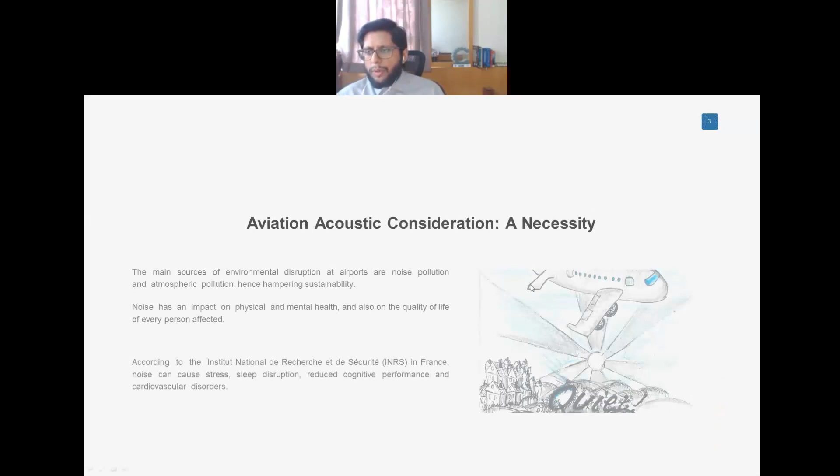So for today, we will be discussing about aviation acoustic considerations. That is the topic of today, and how it is related to environment and hence sustainability.

As you would know, the main sources of environmental disruption at airports would be noise pollution and atmospheric pollution, thereby hampering sustainability. I will come to this in a moment, how we define sustainability. I believe most of you would already know what sustainability is, what sustainable development is, what the SDG - Sustainable Development Goals - is, and how our studies and everyday life relate to these 17 goals of SDG.

Noise has an impact on physical and mental health, and also on the quality of life of every person affected. According to the Institut National de Recherche et de Sécurité in France, noise can cause stress, sleep disruption, reduced cognitive performance, and cardiovascular disorders. I will bring a little bit on how noise generated is basically affecting a person's health. The consequences of noise environment at airports are inevitable.

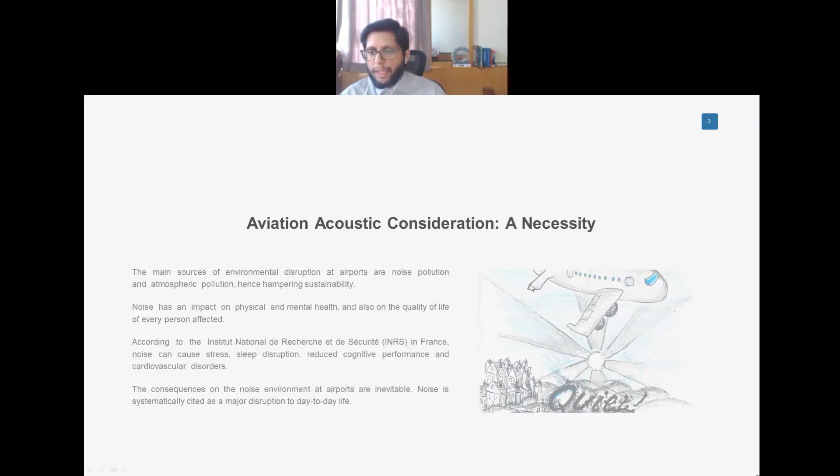Noise is systematically cited as a major disruption to day-to-day life, based on studies that have been made and feedback received through complaints. The residents are complaining on an everyday basis - that is quite an issue. So how should aviation acoustic noise or acoustic performance be evaluated and improved?

A little bit about the aviation industry - I believe that most of our listeners today are within the aviation industry.

So a little bit of facts and figures, but bear in mind that these facts have been last updated by the end of 2019. As you would know, perhaps some of the figures would change because of the COVID-19 consequences, the repercussions due to COVID-19.

I am quite optimistic about the industry. As you would know, by now there are around 1,400 airlines operating across the world, flying over 25,000 commercial aircraft. So the total number of commercial aircraft that these airlines possess would be 25,000.

In 2019, 4.5 billion passengers were carried across the world. Airspace is managed by around 173 air navigation services and across 3,900 airports. This is quite a lot, considering that aviation is a quite recent industry, around 100 years plus, compared to other industries like automotive.

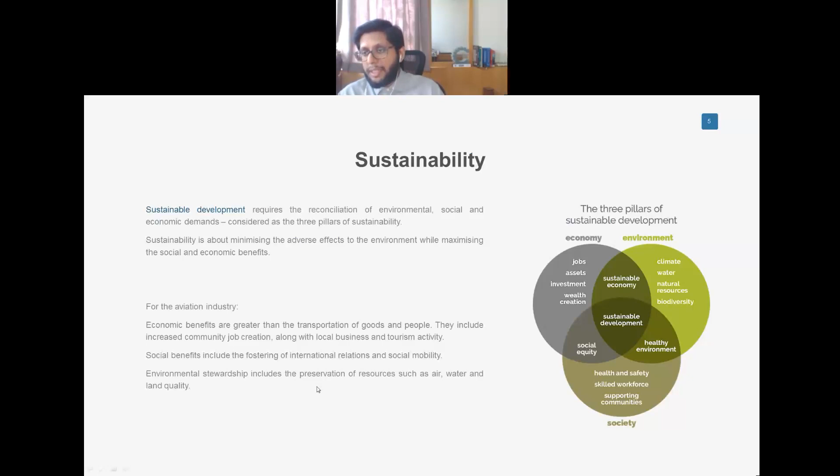But whenever environment is concerned, we need to advocate for it. We need to make sure that our technologies are not affecting the environment, or at least minimizing the effects of the technologies. So this is a bit of the basis of noise.

Sound is a vibration that propagates as a mechanical wave. This is the physics of pressure and displacement through a medium, and it is measured in decibels, dB. What is sound? A basic definition from dictionary.com.

Noise is basically any unwanted sound. Noise pollution is an environmental stressor second to air pollution, meaning that after air pollution, the most consequential type of pollution is noise pollution.

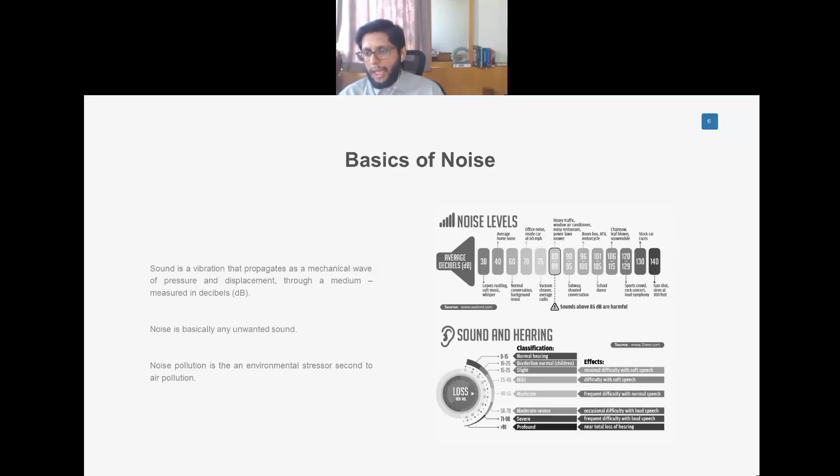So what is the impact of noise on humans? Although most of you would be in engineering, I guess at the very least you did biology at some point in your education.

Researchers have found that dying from a heart attack was more common among people with increased exposure to aircraft noise. This means that if a person is not sick, the chances of having a heart attack if exposed to aircraft noise is higher - the probability is higher.

So you have the acute effects, chronic effects, and long-term effects. The long-term effects include permanent hearing loss and tinnitus. Tinnitus means the person will be hearing a noise all the time, like a vibration inside the ears.

Coming to the chronic effects, hypertension is quite clear, along with reduced learning and productivity - this is what I meant earlier about cognitive performance. And endocrine disruption means the hormones are being disrupted.

The acute effects are short term, and you wouldn't get a very good sleep. You will be annoyed, and perhaps your hearing ability would be affected at some point, even in the short term.

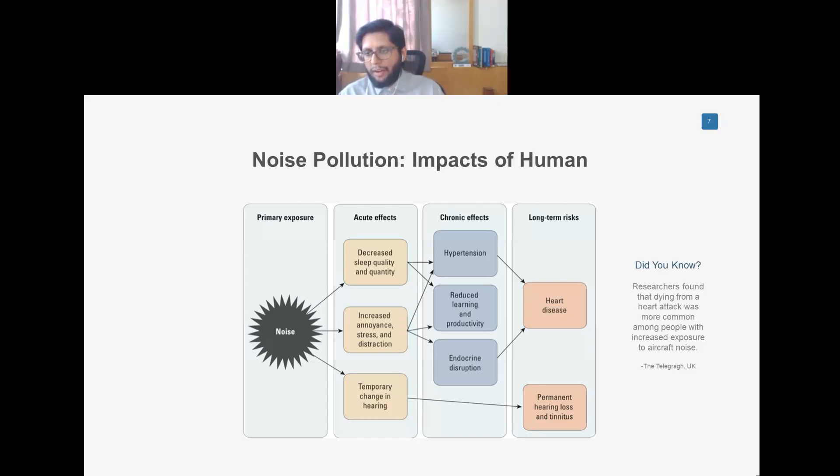This diagram is about noise pollution, not necessarily due to aircraft, but this is the basis of the noise. What is the effect on human beings? Okay, coming to the real topic of propulsion and aircraft noise generation.

There are two primary sources of aviation noise: aerodynamic and engine. The aerodynamic noise results from the flow of air over the fuselage of an airplane. While the aircraft is taking off and landing, the noise is large compared to when it is cruising.

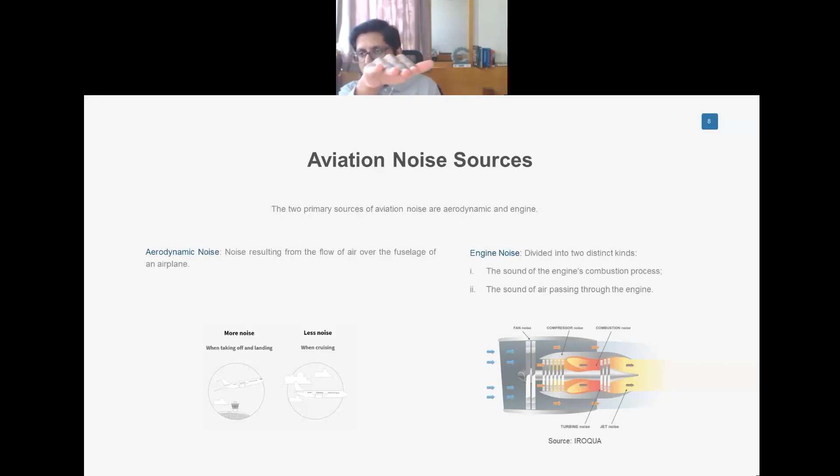So why is that? Maybe you can think about putting your hand outside the car window while driving, perpendicular to your movement - you'll notice the noise is higher than if you put your hand horizontal to the direction you're going. Like this, it creates much more noise.

The aircraft makes more noise because the airflow is almost perpendicular, around 95 degrees - not in the same direction as the airflow. That is the basis. From 0 to 90 degrees, the more you increase the angle, the noisier it becomes. That's why when cruising, the sound is less.

Now what about engine noise? The engine noise is generated because of two main reasons: the engine's combustion process, and the sound of air passing through the engine. You can see in the picture these two distinct kinds, though it's quite distributed, showing the noises generated through an aero engine.

The two most consequential ones would be, maybe you can guess, the fan noise and the jet noise - the inlet and the outlet. These two are louder compared to the compressor noise and turbine noise, which is inside the engine.

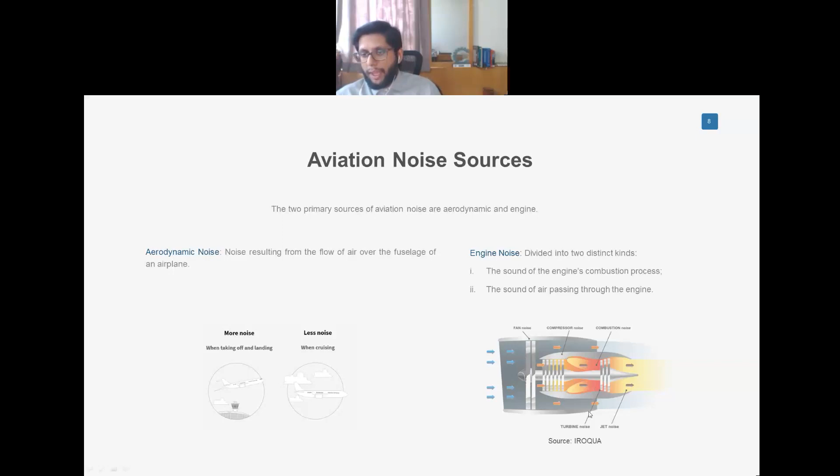In a turbofan, aero engine noise is created by the interaction between flow non-uniformities, stator blades, and rotating blades. Perhaps you can imagine from your previous class where the stator blades and rotating blades are located.

In modern high bypass ratio turbofans, the noise generated by the fan system plays the main role compared to that generated by the turbine stages and compressor. Comparing turbofans to high bypass ratio turbofans - we will come into this later in more detail, but perhaps you can get an idea of what I'm explaining. So that is regarding the fan.

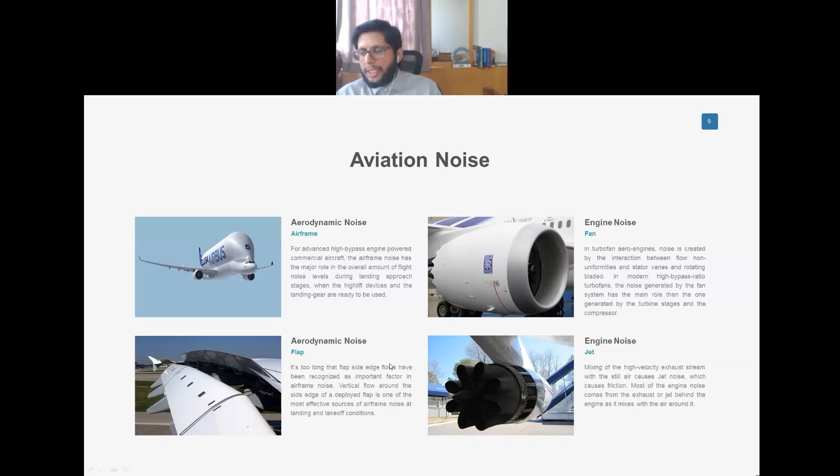Considering the actual technologies - propulsion noise. The engine has traditionally been the major source of noise, due to what we've seen in the picture, and other engine noise sources such as combustors and bleed handling are now becoming even more significant. Because the fan, turbine, and compressor turbomachinery noises have been researched and new technologies implemented.

So maybe if one of you is interested in doing research, one gap you could see is that the noise due to combustors and bleed handling needs to be studied more now compared to the other noises.

Engine noise has significantly reduced as the bypass ratio of the engine has increased. So the higher the bypass ratio, the lower would be the noise. It is inversely proportional.

Acoustic liners in the nacelle are important in reducing the noise from engine internal sources as it propagates along out of the intake, bypass duct, or core duct. So the sentence explains itself.

The aircraft takeoff and climb performance has an important influence on departure noise since the thrust required and altitude gain greatly affects noise heard on the ground.

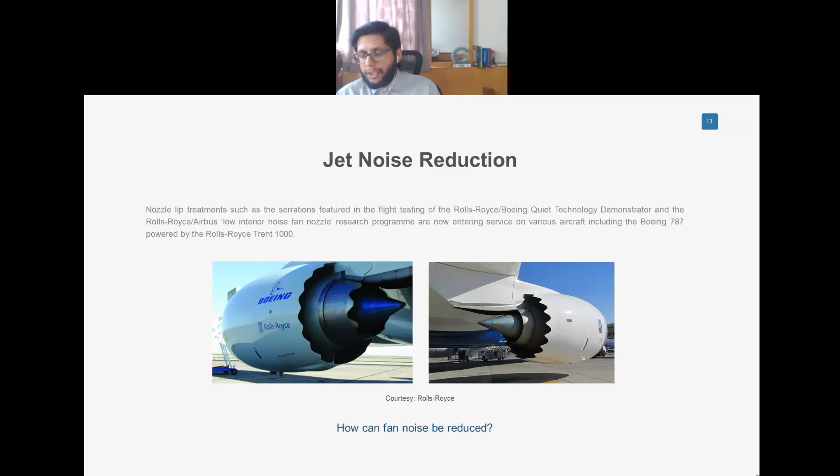Okay, coming to the fan noise reduction with the reduction in jet noise. Fan noise is becoming the dominant source of aircraft noise. So design features of the fan system for minimum noise include choice in the number of rotating blades and static vanes, the distance between these two rows of blades and vanes, and detailed geometries of the rotor blades and stator vanes. Okay, these are vanes, and then stators.

I'm sure that you followed the class of Rahim, so you would have a better idea of what is being written over here. So key issues are the fan aerodynamic and mechanical performance, stability and stall margin, and the manufacturing complexity and cost.

So if you are interested about doing simulation and modeling for your masters or for further studies, and you are also interested in acoustic technologies, that is one point for you to look into, because there is a gap in looking for solutions to decrease the fan noise as well as the compressor and turbine noises.

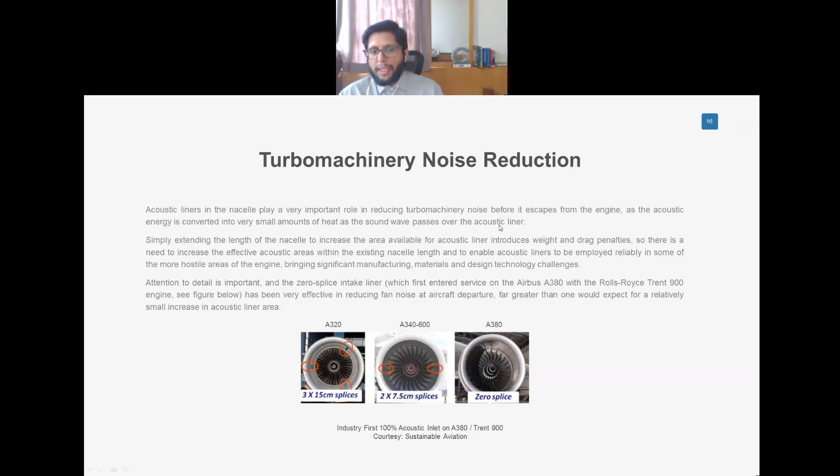Okay, so it has been quite a lot of technologies. Let me try to resume what we have been speaking about and where we really are.

The reference for that is 'Technologies for Aircraft Noise Reduction.' It is a review paper published in 2020, this year. Please go through it, look for it, and you will get much more information about these technologies that are being employed.

Reducing engine and airframe noise has formed a key element of UK aerospace manufacturers' design criteria since the introduction of jet aircraft in the early 1960s. As you could see in the previous trend, two trends have been observed. The first is a significant step change reduction in noise associated with increase in engine bypass ratio - this is one key approach that's been adopted, increasing the bypass ratio.

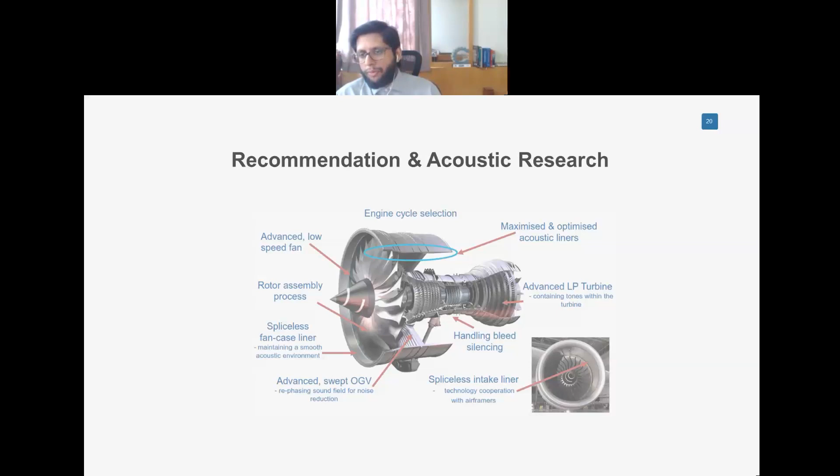The other approach really being looked at nowadays is acoustic liners. As you can see here, I've circled it - this tries to make it soundproof, kind of. So it's already spliceless, but we can still make it soundproof at some point. That's about acoustic insulation.

So you should be looking at materials that can be used to cover the nacelle, to cover these acoustic liners. But of course, the materials cannot be heavy, otherwise the weight of the engine will be heavier, and the performance will be compromised. So you need to look for materials that are light but still deliver sound insulation. This is regarding acoustic liners, and as well you can look at the other ones.

Okay, so environment. This is related to sustainability now. We have already looked at technologies, the technical aspect. So let's see the sustainability aspect. Whenever any aircraft is being designed, you have a combination of parameters that you need to look at so that the aircraft efficiency is good. You have the performance that is related to safety, and as well as performance, but you also have the environment attributes, which is noise and fuel.

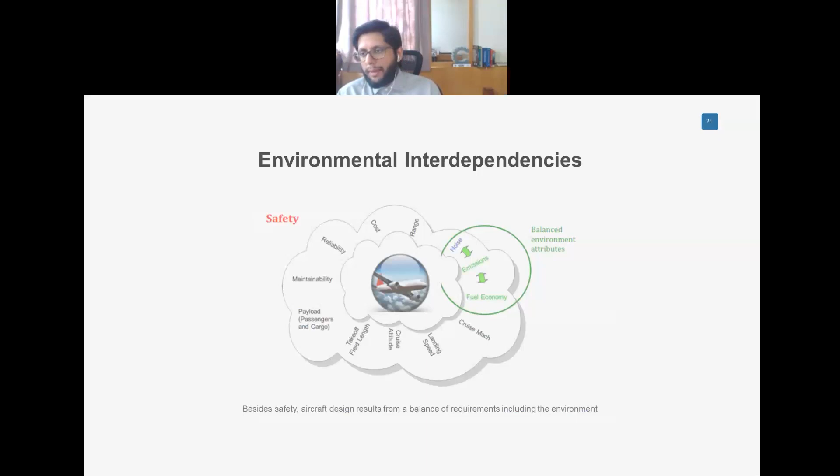So these two are interrelated. There are two emissions: you have fuel emissions and you have noise emissions. These two emissions are both attributed to the environment, of course. So whenever you want to decrease noise, like I mentioned before, maybe the fuel efficiency might be compromised. So it goes vice versa.

So the local environment agenda for aviation is driven largely by noise and occasionally by local air quality impacts, whereas the national and international agenda is primarily focused on climate change and carbon dioxide emissions. So you can see that the international and national agenda as well are quite focused on climate change and carbon dioxide emission. What about noise emission? Not really, yeah? You cannot see it over here.

So addressing these often competing demands is a constant challenge. Achieving an improvement in one area may come at the expense of another. Furthermore, noise solutions must be compatible with all other design requirements of both engine and aircraft. For example, the aircraft performance, the aircraft operating costs, the business needs, the manufacturer and the operator, the safe operation of the aircraft. So all these design parameters need to be taken into consideration.

So to best match the different requirements, the aircraft and engine manufacturer should be working closely so that we can come up to an optimum airframe and engine combination. Not all technologies are optimum on all aircraft, of course, because it is being compromised, and a total system optimization has to be conducted. So you need to look at the complete aircraft performance while designing aircraft.

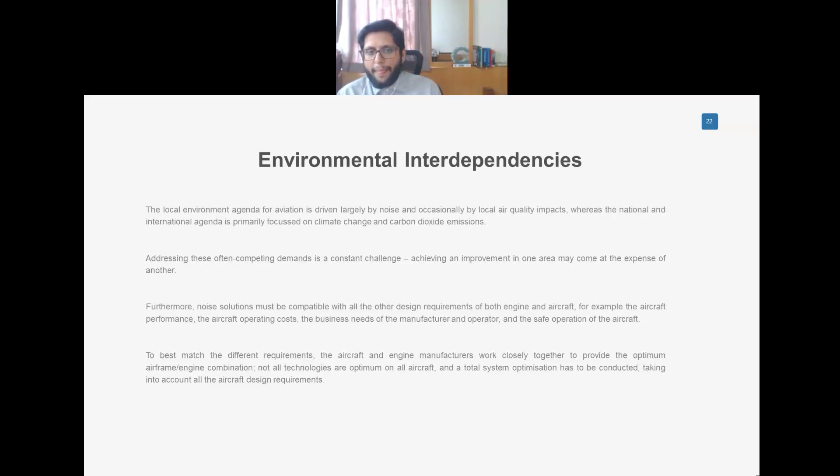So this is a bit of the balance environment attribute, as I just mentioned. For example, the engine parameters for the Airbus A380 were being influenced to meet the QC2 departure noise level. This is an operational demand at the London airports. So there has been a detriment to it, regarding the fuel burn and thus CO2 emissions. So if they wanted the noise to be lower around the airport, the aircraft somehow has burned more fuel, thereby emitting even more carbon dioxide.

Another example would be about the large extension of cowling around an engine. It will definitely reduce the aircraft noise, but potentially lead to increased aircraft weight and drag, resulting in more fuel used in operation. So this is again an example of trying to contain the noise, but it is being compromised by the weight and drag, and hence the fuel efficiency.

Another example would be the open rotor engine architecture, which offers significant potential for reduced fuel burn and CO2 emission. Although open rotor engines are likely to be quieter than today's turbofans, there is a trade-off between the fuel burn advantage and the noise reduction potential of conventional turbofan design. So there is again a compromise between these two.

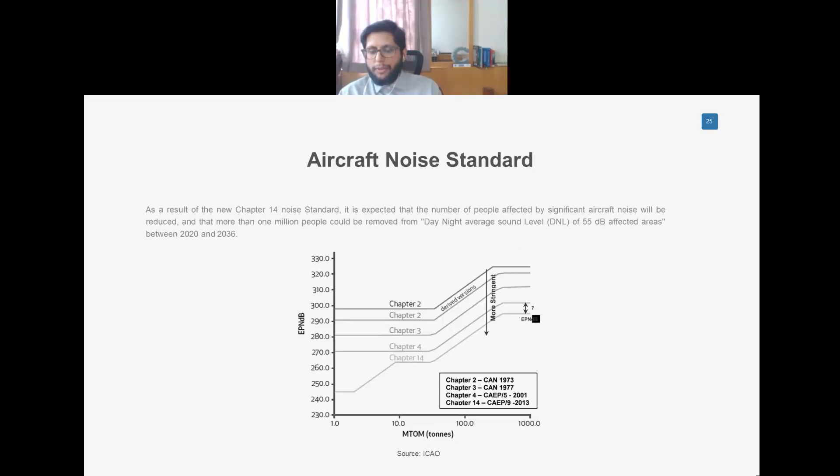How do we quantify aircraft noise? There are basically four types of noise metrics used to monitor the noise level around airport areas: time-based noise metrics, single event-based noise metrics, threshold-based metrics, and track-based measures. At least you should be aware that there are four types of metrics that can be used to measure and quantify aircraft noise.

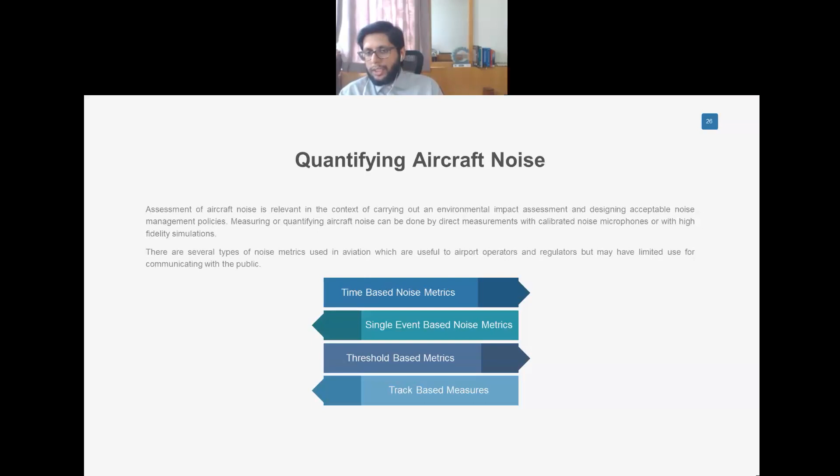This can be done by direct measurements with calibrated noise microphones or with high fidelity simulations. So if you have the proper input, you can simulate it, or do the actual test, or maybe do both to make sure your simulation is calibrated and correct. Although the four types of metrics are general methods that can be employed, ICAO has its own measurement.

And this is the reference. This picture shows the three reference points that should be taken into consideration while the aircraft is being tested for noise performance: the flyover, the sideline, and the approach.

So the aircraft acoustic certification involves measuring the noise level of an aircraft in effective perceived noise level (EPN) at three reference points, as shown in the picture. If the aircraft manufacturer passes this test, it means it can be certified by ICAO.

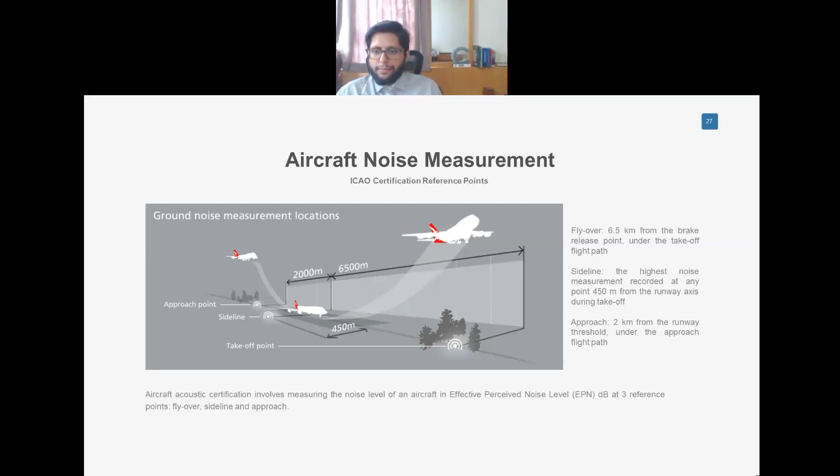Now coming back to the title, gearing towards sustainability, for quiet skies and sustainability we need to find a framework, a way to ensure that this target of quieter skies is being achieved systematically. For this, ICAO has brought forward a framework with four approaches, four techniques that need to be harmonized to make a balanced approach.

The first approach is reduction of noise at source, that is the aircraft itself. The second is land use planning and management, so that people basically don't have houses near the airport—that is about the planning, the land use planning.

The third is noise abatement operational procedures, which is a job done by the pilot. Perhaps not only the pilot, but sometimes it is up to the pilot to decide which way to approach the airport. Otherwise, the pathway is already set by the people concerned, and the pilot just follows the new route, so as to avoid crossing near residential areas.

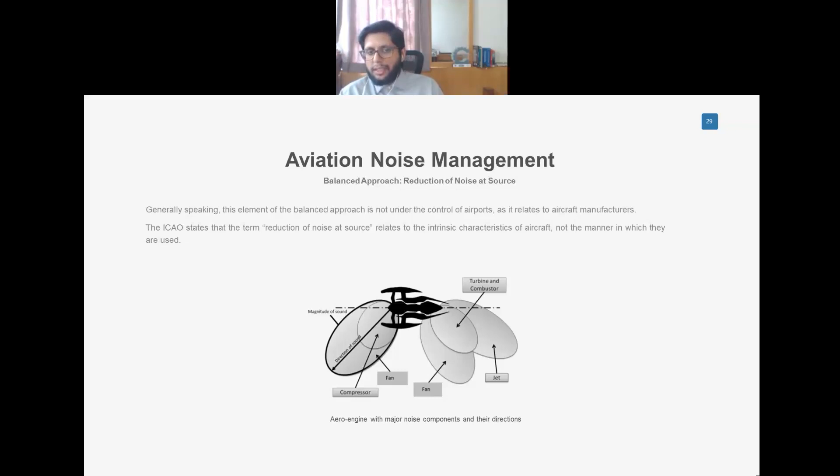The second one from the balanced approach is about land use planning and management. This can be effective in ensuring that activities taking place near the airport are compatible with aviation. The goal of this principle is to minimize the population affected by aircraft noise by means of zoning - that is, you have a certain zone. Different noise zones around the airport are defined to take account of aspects such as population density, increased airport traffic, or logistic activities. A good example would be KLIA, which has been shifted to Sepang.

It is quite far from the residential area. Over there it is quite an industrial zone, and a cargo zone, and there are quite few residents near the Sepang KLIA airport.

Land use planning and management methods may be characterized as follows: there are three - the planning instrument, the action instrument, and the financial instrument. So you have three subdivisions to ensure that land use planning and management is being implemented properly.

The planning instrument consists of ensuring that planning is coherent, drawing up legal definitions of zones, and considering relocation rights for landowners. Let's say they already got the land, so let's see whether there is any possibility for them to shift, and to offer compensation. So this is the planning.

The action is what needs to be done and what is being done: building regulations, soundproofing programs, assignment of compatible users to purchase land, land management review, and grants - allocating grants for relocation and housing of affected residents.

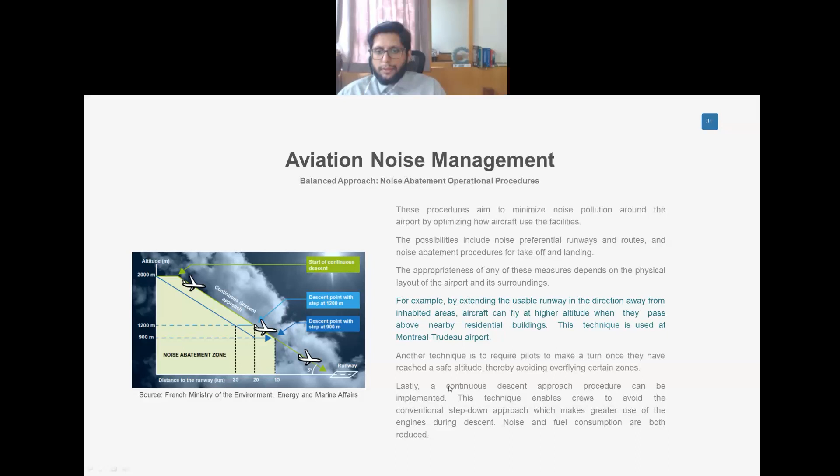The fourth one, the last one, is about operating restrictions. Restrictions can be placed on aircraft operating at certain airports. There are four types: global restriction, applied to all traffic at an airport; restrictions specific to certain types of aircraft because of their performance; partial restrictions, which apply about daytime and night time, specifying what times they can be operated; and progressive restriction, which entails gradually decreasing noise exposure over a period of time before reaching the target noise level.

So this is a progressive restriction being implemented as time goes along. Some countries, especially industrialized countries, have considered banning certain noisy aircraft from the airport. This measure can have serious economic implications for airlines concerned. If they put a ban on certain aircraft, you can imagine this will have a repercussion on the airline.

Hence, ICAO advises to start with the 3 principles, keeping operating restrictions as the last resort, because it is related to economic development as well. That is why it is taken as a last resort. Let's say the airline is performing well, but its aircraft is quite old. If you put a certain restriction, that has an economic implication on the jobs of the people working in the airlines, if the airline has to stop operating certain aircraft.

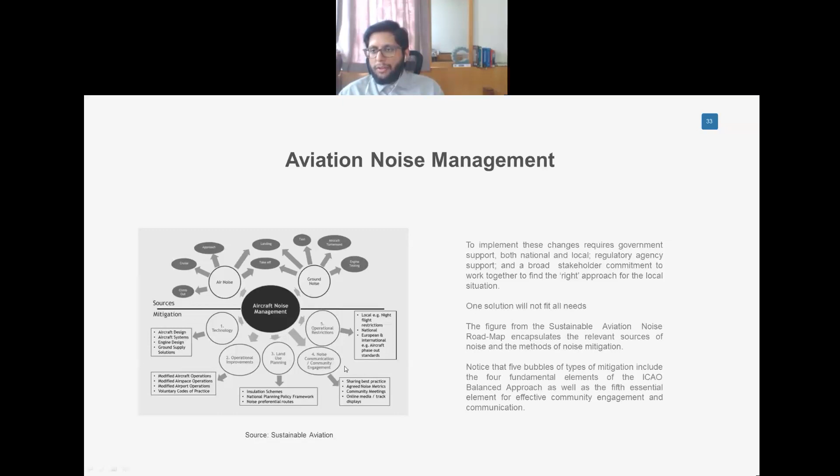I would like to share some examples of implementation of the balanced approach. We have 3 airports over here, and it dates back a little bit, to 2001, 1997. This shows that ICAO has already brought forward the initiative to reduce aircraft noise.

So we have certain complaints. Let's say for Brussels, we had 87 complaints. Liège had 27 complaints per year on average. Manchester in UK had 838 complaints per year.

So consider the Manchester airport - you can see that the implementation of the balanced approach has reduced the noise from aircraft, and the implementation rate is at around 87% for now. So it is good progress. You can take it as reference, and have better literature quoting these different airports related to noise.

The source of this information is from 01dB. You can look online for 01dB - it is a company working on noise reduction coming from aircraft. So you will have lots of other examples of implementation of the balanced approach.

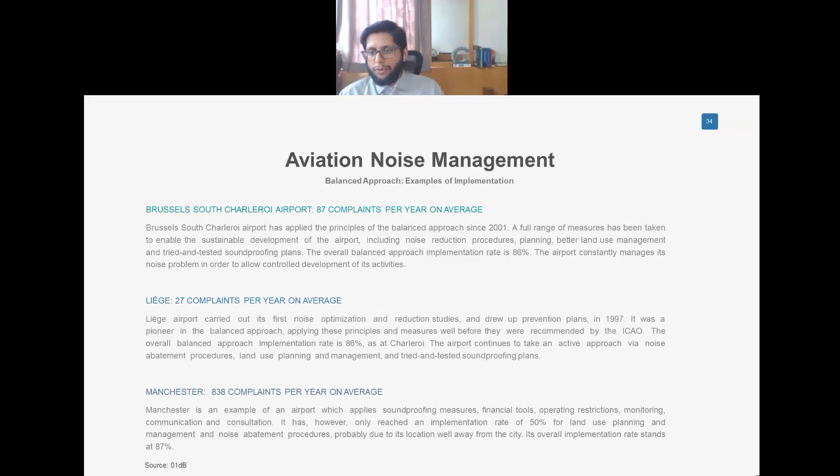Before we trail towards the end of the presentation, I would like to share with you some case studies. One case study is about the use of noise modeling tools. If you remember, I mentioned a moment ago that simulation is one way to look into the noise effects around the airport.

Alaska Airlines partnered with Boeing and the Portland, Oregon Air Traffic Control. They brought more efficient and quieter airplane arrivals to the airport using performance-based navigation procedures. They used the INM required navigation performance precision arrival procedures, which were evaluated - what was the outcome of it?

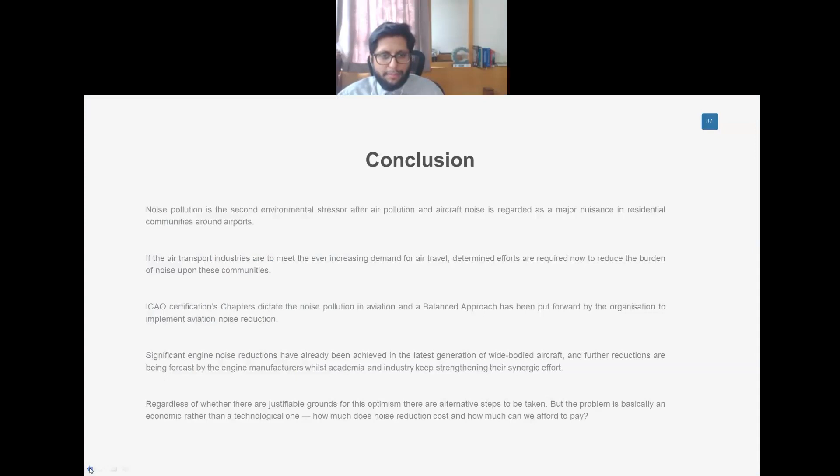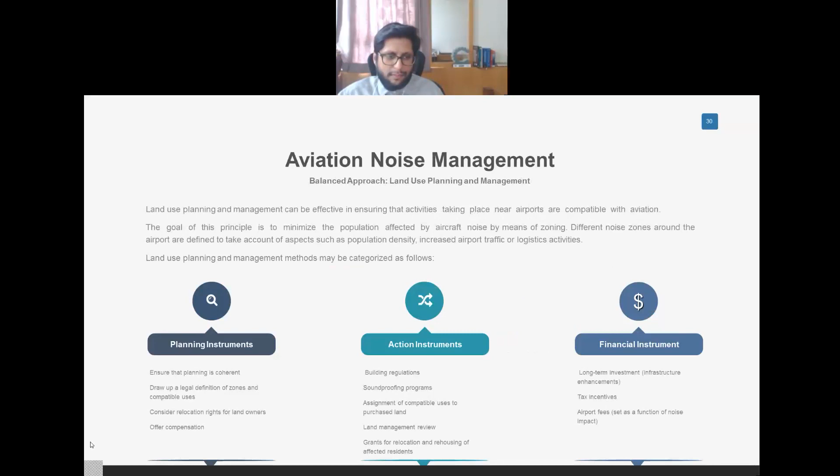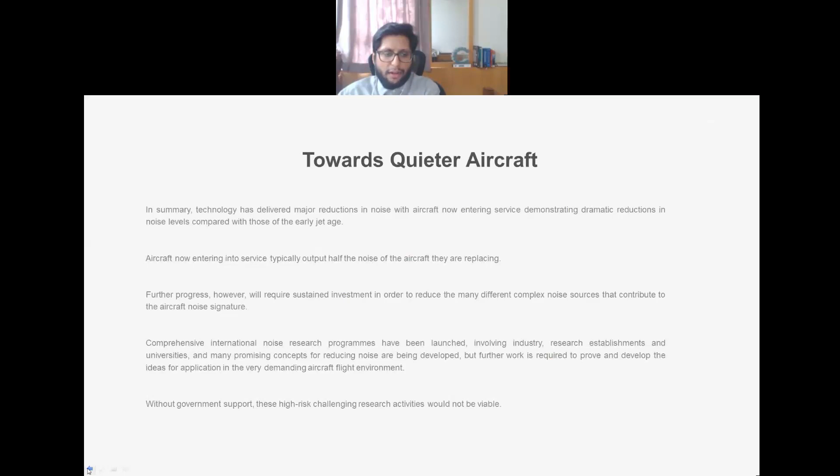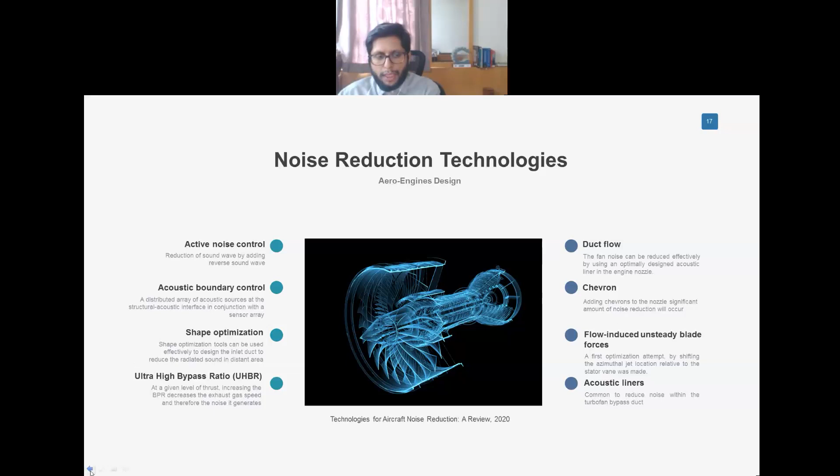Let me go to the slide that Dr. Rahim just showed - there are quite many slides. So that is correct, comparing that. Okay, this is one slide that we can consider to reply to the question. These are the technologies that can be opted to reduce sound, to reduce noise coming from an engine. But of course, perhaps not all of these technologies can be added to all engines. While designing one of it, it could be possible that the whole engine needs to be changed. So we have different families of aircraft engines, but it would be much easier.

Okay, thank you for the questions. Probably there are many other questions from the participants, but since we are running out of time, I also have to catch another meeting.